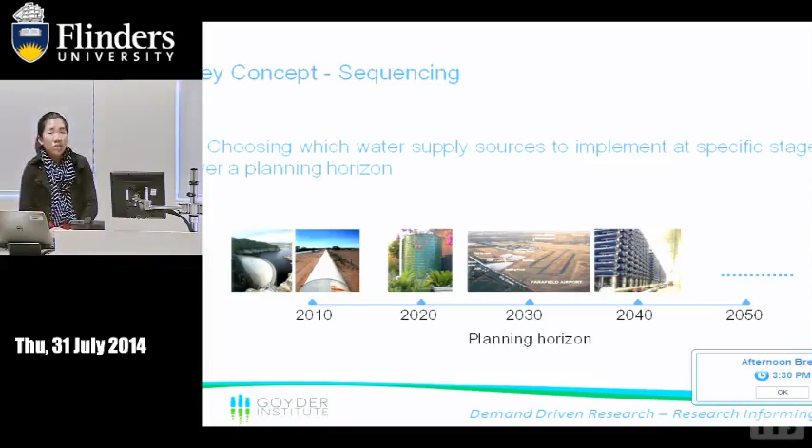As a result of increasing population, climate change, climate variability, and the consideration of multiple sustainability criteria, the problem of sequencing water supply sources has become more complex in recent years. Due to increasing demand and reduced water supply reliability, there is a need to consider recycled water or desalination plants as additional water supply options.

In addition, the need to develop a sustainable water supply system has become increasingly important, requiring consideration of multiple sustainability objectives. So now we're not just looking at the economic cost of the system, but we also need to consider environmental and social criteria. Adoption of sustainability criteria also requires consideration of extended planning horizons of 50 or 100 years, and this will promote increased uncertainties such as population growth, climate change, and technological changes. Furthermore, there is a large level of uncertainty in the supply as well due to climate factors.

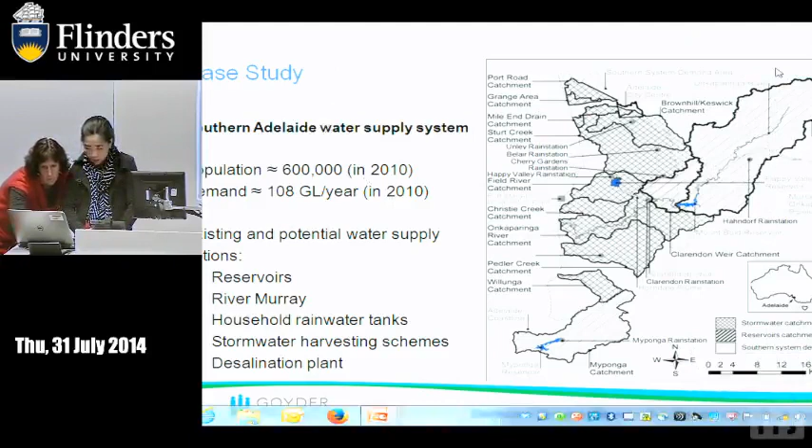This proposed approach is applied to the case study of the Southern Adelaide water supply system to demonstrate and test its utility. It should be noted that the aim of the case study is not to solve the Adelaide water supply system problem, it's just to demonstrate the approach. This is a simplified case study based on the Adelaide Southern system in year 2010. There are existing water supply options such as Happy Valley and Myponga reservoirs, supply from the River Murray, and the potential water supply options we consider in the case study are household rainwater tanks, stormwater harvesting schemes, and a desalination plant.

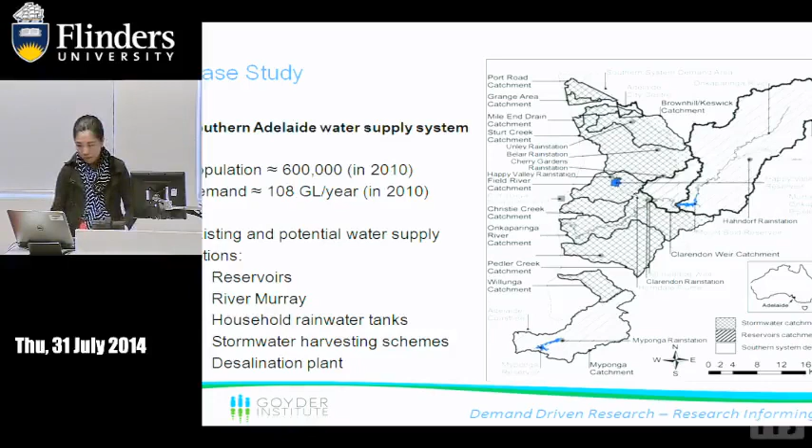The objective of the case study is to minimize the present value of costs and also minimize the present value of greenhouse gas. Decision variables are the timing to implement new supply sources and also the time to expand implemented desalination plants, which means if we implement a desalination plant in the first stage, the following decision variable would be the timing to expand or not. One of the decision variables is the capacity of the rainwater tank.

The uncertain variables we consider are future population growth and also climate change impact in terms of rainfall and evaporation. This case study is done for two assumed realities, and each reality will consider 7 different possible scenarios. The planning horizon is 50 years with a 10 year staging interval, which means we're looking at a 50 year plan, but making decisions every 10 years.

This proposed approach consists of 3 major components. The first is to identify a diverse portfolio of optimal water supply sequences for 50 years using a scenario-based multi-objective optimization model. The second component is to assess the performance of the portfolio of optimal sequence plans in terms of robustness and flexibility over the current staging interval, and also to look at the variation of cost and greenhouse gas for the whole planning horizon.

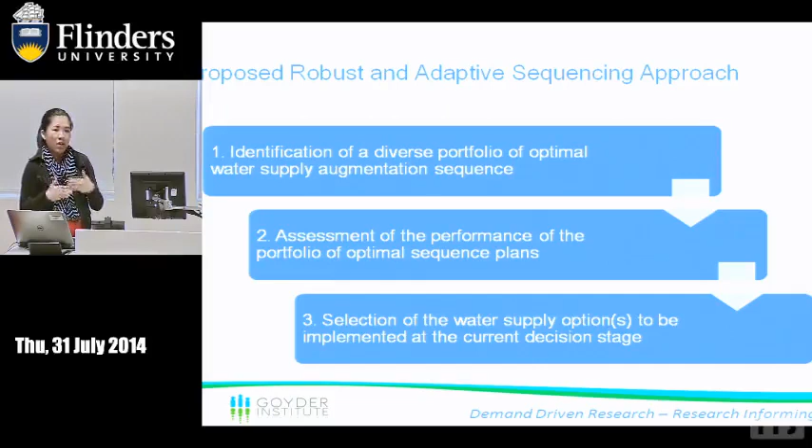We'll actually look at the robustness and flexibility for the current 10 years, even though the plan is optimized for 50 years. I'll explain that in detail later on. The third component is to select which water supply sources to be implemented at the current staging interval. We are planning for 50 years, but we don't want to lock ourselves in for the future 50 years. So we assess the robustness and flexibility of the system for the current 10 years, and then decide which supply options to implement and lock in for the subsequent stages.

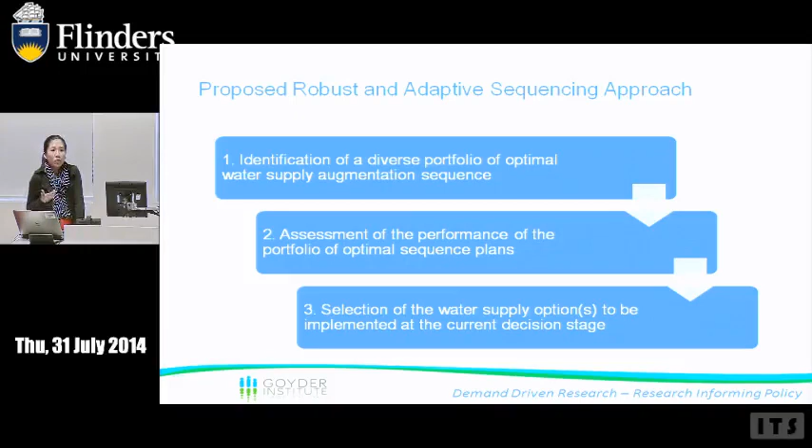For the next decision stage, we'll do the same thing, because uncertain variables like future population growth and rainfall will change over time. So for the next staging interval, we will plan for another 50 years using a new set of projected population growth, rainfall, or evaporation data.

The robustness of the system is calculated based on the reliability of the supply and also the vulnerability of the supply. Reliability of the supply is a measure of how frequently the supply capacity equals or exceeds the demand, and vulnerability is the percentage of the maximum annual supply shortfall over the planning horizon. The robustness of the supply is the fraction of scenarios when the system reliability is greater than 95% and the maximum vulnerability is less than or equal to 27% of the demand.

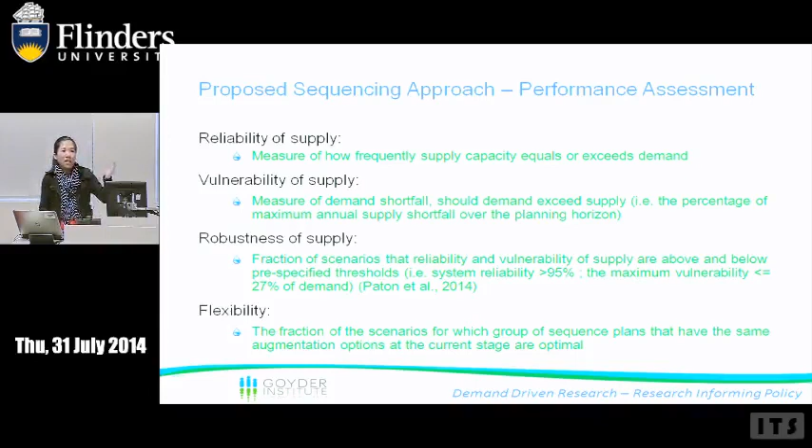The flexibility of the system is the fraction of scenarios for which a group of sequence plans have the same augmentation options at the current stage. If we're considering 10 uncertain scenarios, and that group of water supply options appears for all of them, then they will have a flexibility of 1. If they only appear in one of the scenarios, they have a flexibility of 0.1. So 1 means more flexible, 0.1 means less flexible.

This is the first step of the sequencing process. The first thing we need to do is define the uncertain variables and their range. For the case study, I'm looking at future population growth, rainfall, and evaporation, so I need to define the range as well. Then I need to define the scenarios, which are the combination of the selected uncertain variables. The range and the scenarios should be selected to reflect the best current knowledge in relation to the possible changes of the uncertain variables over the planning horizon.

And then the optimization process will be repeated for different scenarios to generate different sets of the Pareto front solution for each scenario. So for the case study, we're looking at 7 different scenarios for each reality.

So we'll get seven different Pareto front solutions. And this optimization, we're actually looking at a 50 year planning horizon. So the next step is we need to assess the performance of the sequence plan. But this step, we're only looking at the current staging interval, which is 10 years. As I said, we don't lock ourselves for the future 50 years.

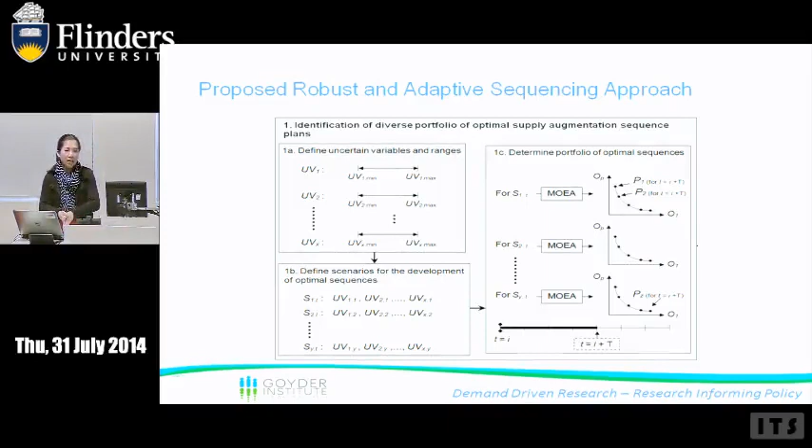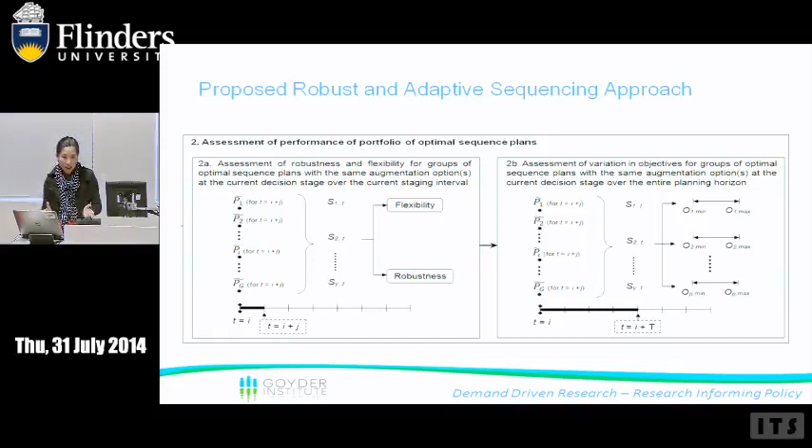So if we go back, if we look at P1, it actually conceived a plan where rainwater tanks should be implemented in year 2010, followed by stormwater schemes in 2020. But the next step, we're only looking at the rainwater tank implemented in 2010. So what we need to do is we need to assess the water supply sources, which is chosen in 2010. But the range of the cost and greenhouse gas we're considering, it's for that whole 50 years.

So this process that I just mentioned will be repeated for every decision stage, and this is because the uncertain variables change over time, so the scenario that we consider might change as well. So we need to actually do the whole process from stage to stage.

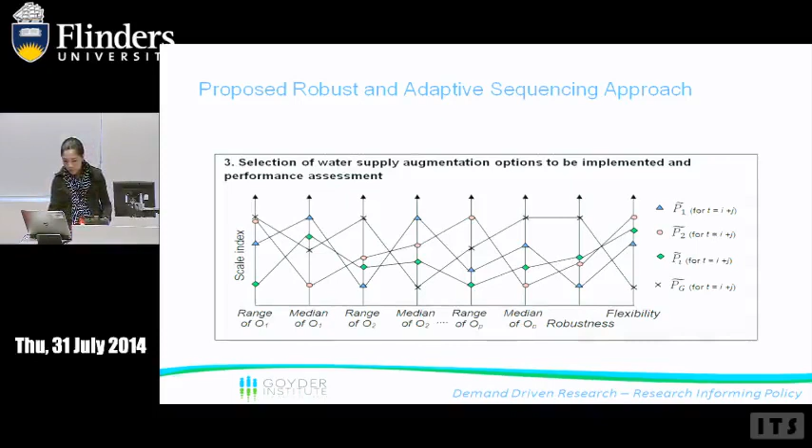So if we look at solution 1 and 2, they actually perform better if we just look at the median of the costs. And solution 4 and 6, they have a high level of robustness, but they have a very high median of costs. So there's a trade-off there.

And sequence plan group 3 and 5 tends to perform well across all the performance criteria. So they clearly outperform all other groups in terms of median and range of the greenhouse gas. But you may find, in terms of flexibility, they're actually at the lower end, but there's a trade-off: if the flexibility is slightly lower, you get a higher robustness.

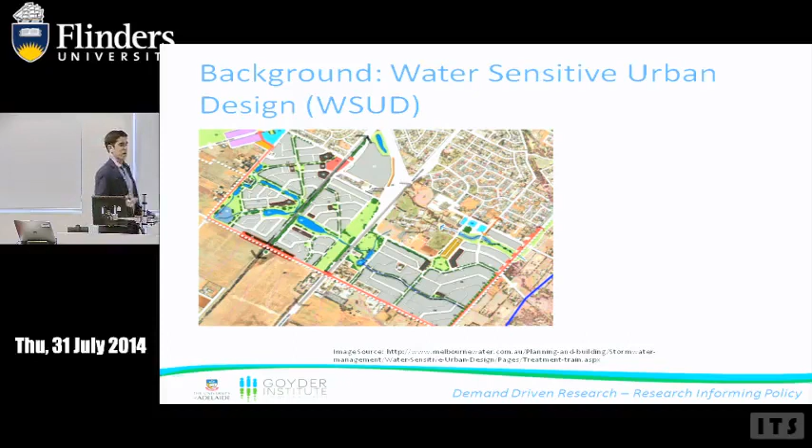So a bit of background about the concept of water-sensitive urban design. You may have heard of it before. If you imagine we have some unused farmland here at the moment, when we have a rainfall event like today, the behaviour of the runoff is going to be radically different once we decide to get more value out of that land with a housing development. When water lands on that catchment, it's going to run off a lot quicker and in much higher volumes, and it's also going to introduce pollutants into our natural environment.

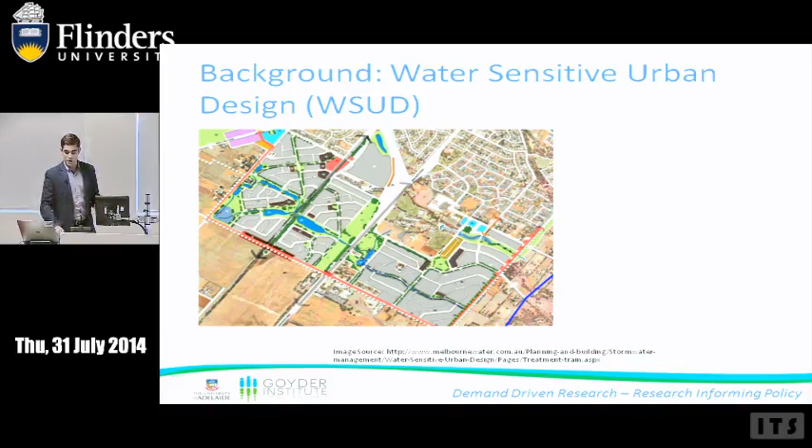To deal with some of these problems, the evolving field of water-sensitive urban design tries to get as many benefits as possible out of the design of our development—for example, returning those altered flows back to the natural flow regime, removing added pollutants, protecting our property through flood control, stormwater harvesting and reuse, and also increasing amenity and community benefits through that design. So there are a lot of objectives we're dealing with in water-sensitive urban design.

We strive to achieve those objectives through the implementation of what are called best management practices. You might be familiar with what they are. Under the umbrella of best management practices are wetlands, rain gardens, swales and curb and gutter, sediment ponds, rainwater tanks, and gross pollutant traps. Particular best management practices are better at achieving certain objectives, and some of them can achieve your flood control and treatment objectives as well.

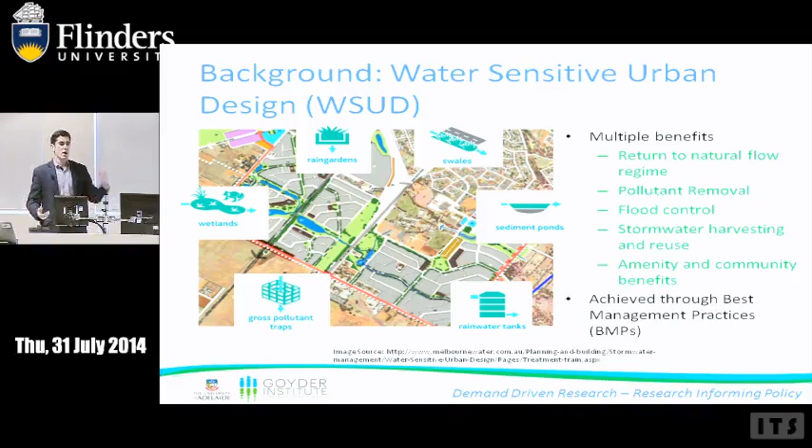And a brief introduction to the optimization approach we're using. Engineers and planners will go out and look at the development site, identify which best management practices can possibly be used, and define the constraints of what treatment practices can be used and in what order. So given those constraints, and also the objectives they want to achieve, we take those objectives and constraints and implement them into our model.

The way the model works is it generates one possible solution to the problem, tests its feasibility through a simulation model—in this example we're using eWater MUSIC for treatment performance—evaluates the performance of that solution, and then feeds it back into our optimization algorithm, which I was trying to think of a good metaphor for.

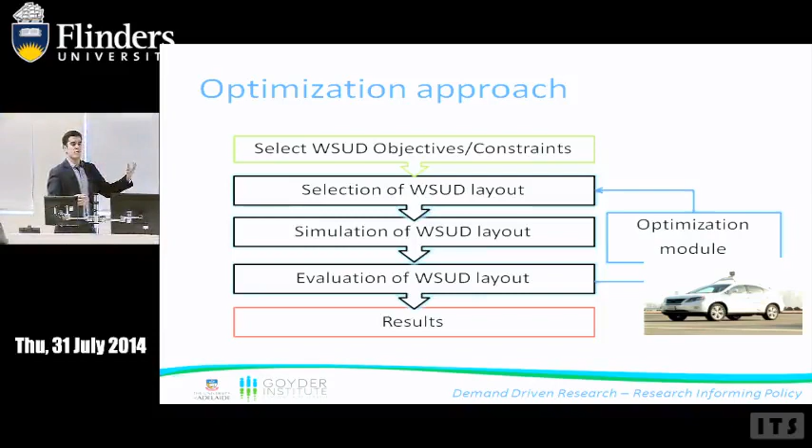It's sort of like a self-driving car. It has some intelligence, some artificial intelligence, and it wants to search through the millions of possible combinations of solutions—trawling through the infeasible solutions, trawling through the solutions that are feasible but don't perform very well—and then try to find the optimal or most efficient solutions with respect to treatment performance, flood control, and our other benefits.

So there's been some challenges that researchers are addressing, like how engineers will use these optimization approaches in practice. We deal with problems of perception of what the optimization approach can do and can't do, what it is and what it isn't.

You might be familiar with internet memes about how different people perceive what we do - for example, environmental scientists, their friends think they do something, their boss thinks something different. I tried to emulate this with what we face in water-sensitive urban design optimization. As a WSUD optimization PhD researcher, I'm looking at computer programming daily, linking that with a simulation model to get accurate, evidence-based results.

Some engineers see that the optimization algorithm, because it has its own artificial intelligence, means perhaps they don't have much of a place in that procedure. They see the whole approach like a self-driving car, and wonder where the place for their experience and judgment in designing these systems is inside this computer algorithm.

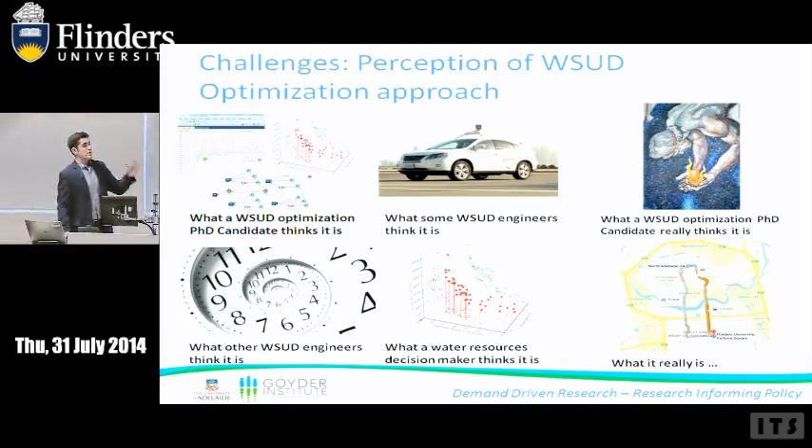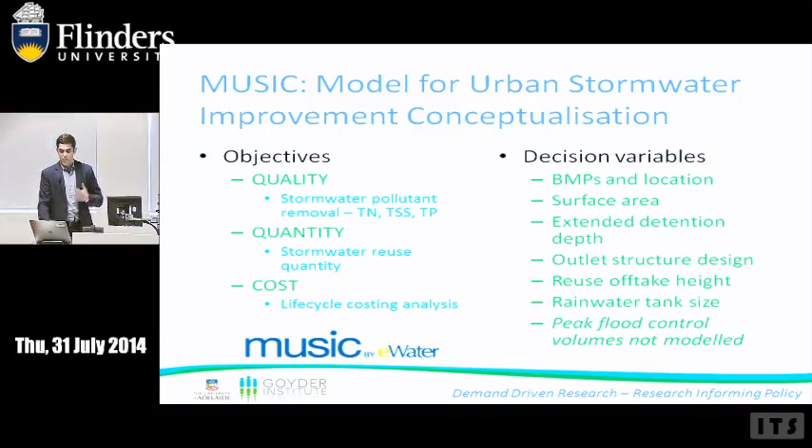Getting into the simulation model we're using, this is linked with the optimization algorithm, and it'll simulate thousands of runs with this model. I think it's an industry standard, and we can assess water quality, quantity, and life cycle cost by changing the layout - what best management practices we're going to use, and where in the catchment we're going to have them. The surface area, extended detention depth of some devices, and other parameters we can change.

As far as how it's constrained in formulating solutions, I've trawled through the WSUD engineering procedures to make sure best practice procedures are implemented into the optimization approach.

We've also discussed with consulting engineers how they approach the problems, to try and garner some of that engineering judgment or knowledge and place it into little rules. For example, the percentage of surface area to catchment size might be indicative of what the optimal size of a wetland might be.

So through the problem formulation - deciding what options are on the table, and also the constraints within the algorithm - is where we've implemented that judgment.

The case study itself consists of a new housing development where there's essentially 6 nodes - 1, 2, 3, 4, 5, 6 - with some options: there's an upstream either detention basin or wetland, we can have rain gardens or not, and also there's an option for a wetland downstream as well.

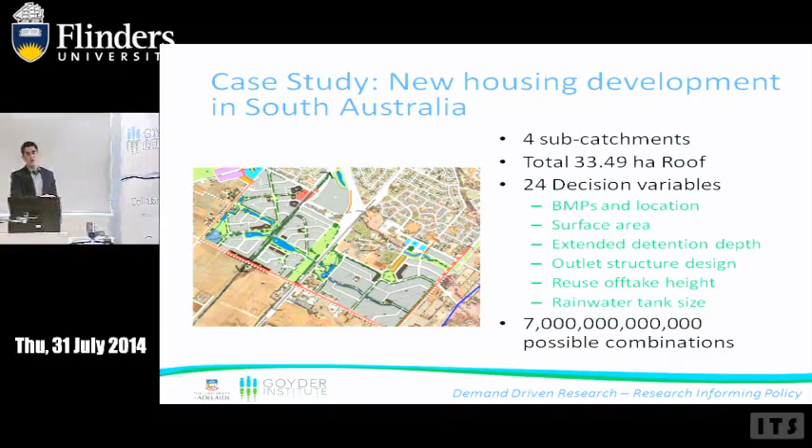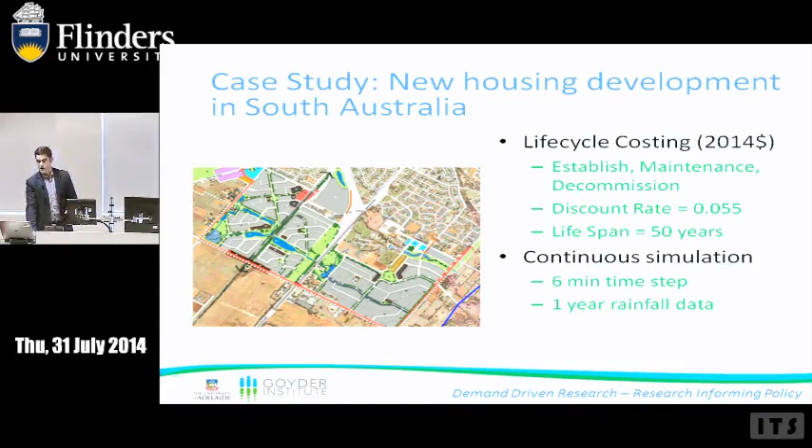And we're looking at life cycle costing there, a couple of data points there, and continuous simulation, which means that runtime is going to be an issue.

The intention of the case study was to look at the trade-off between 3 objectives: the life cycle cost of the system we're implementing, how much treated water can we get out of the system for reuse purposes, and also how well can we treat our runoff.

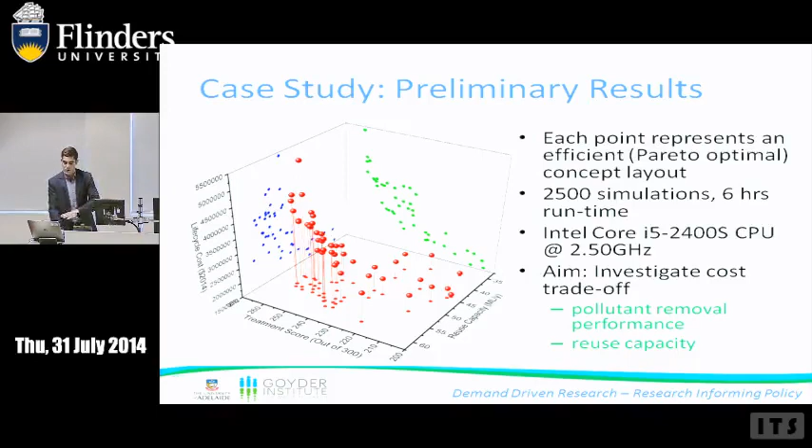So this is jumping straight into what the optimization spits out, or what the results of the optimization are. Each point on that surface there is what's called a Pareto optimal solution - each one is a concept, a potential solution we could put into practice with its own features and combination of parameters. This was done on a desktop computer, so what a consultant might have access to, and around about 6 hours of runtime. So we can look at the projections of these between life cycle cost and treatment, and life cycle cost and reuse capacity.

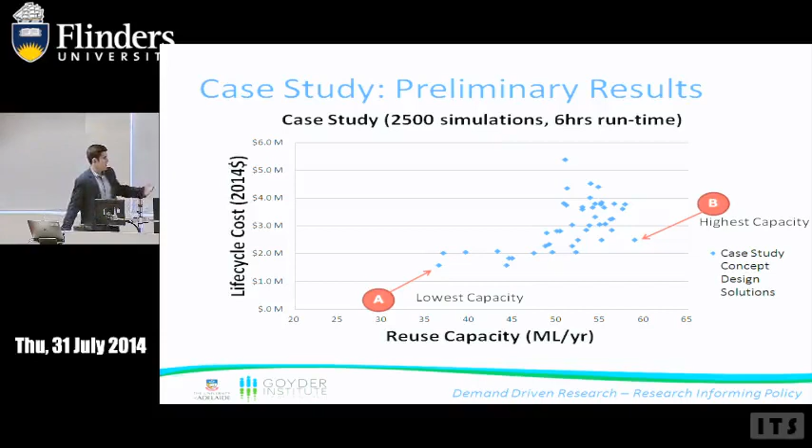So that projection there, I've just identified a couple of solutions to look into in further detail: the solution that gave us the highest capacity for the comparatively lowest cost, and also the lowest cost solution, which incidentally gave us the lowest capacity, potential reuse capacity.

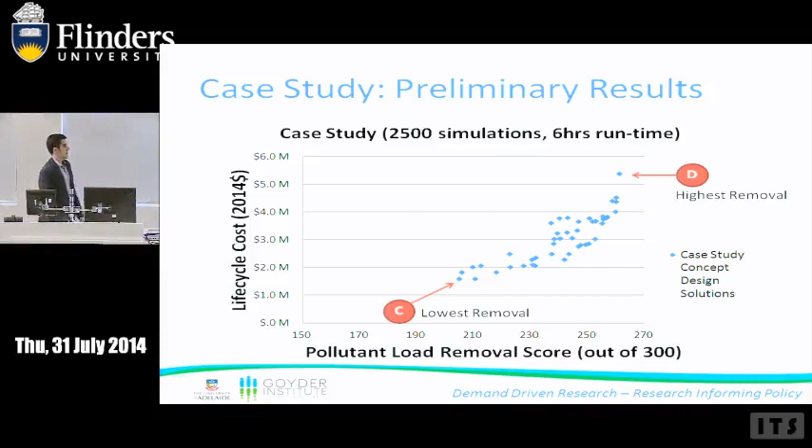And also looking at life cycle cost and pollutant removal. Again, our lowest cost solutions give us the lowest treatment performance, and our highest Rolls-Royce solution gives us a very high treatment at a high cost. I could have chosen a solution that has a little bit less treatment, but you could be saving some money there as well. So we could have also picked that solution.

So once you have these solutions available to you after the optimization results, the idea is to go through and analyze what trade-offs we get. So perhaps having extra rain gardens wasn't actually worth the extra treatment and extra cost.

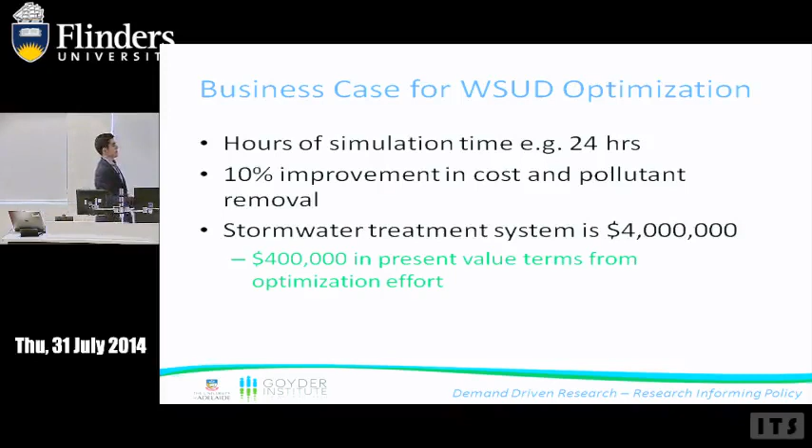So a little bit about the current and future work for this research. We're looking at incorporating more of that engineering knowledge to help that self-driving car find solutions in a more efficient way, so get our runtime down, and address some of the complexity. I know in the new water-sensitive urban design guidelines, they're looking at more continuous simulation for different risk analyses, so that's going to be incorporated into the framework.

And looking at a case study similar to what Eva was talking about, so sequencing these best management practices over time to map the way that the housing development would be built in stages over time, trying to maximise the benefits over a longer period. I think that's all I have for today. Thank you.

Thank you, Michael. Robert is next. Just pop it in your pocket. I think it's the easiest. My pocket's not very big. There we go.

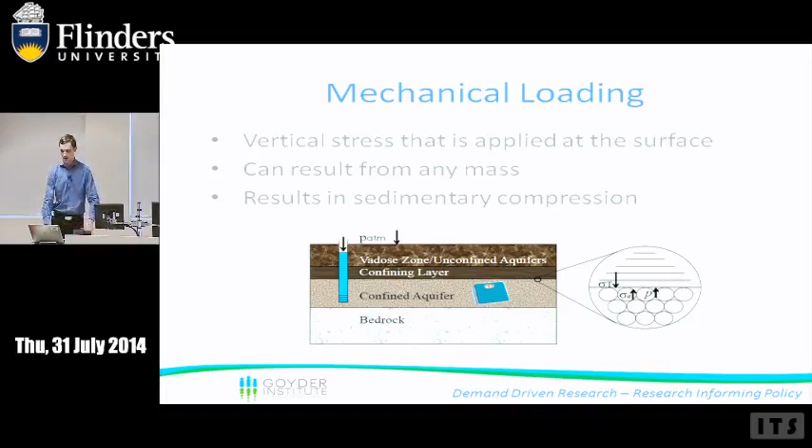And that can result from any mass, so not just a hydrological mass on the surface. It's basically the sedimentary compression which causes this pressure change in a confined aquifer. Oh, there's some weight on the surface.

The performance of mechanical loading is affected by the solid properties of the aquifer that you're measuring in. I assume everybody here knows that a sponge is pretty compressible, and pumice, which looks a bit like a sponge, is quite rigid. So say we put the same load on a sponge and on some pumice, and say also that we build some walls around them so that they're confined and no water can escape.

When we put this load on the sponge, it will compress and the water pressure inside will increase. Whereas when we do this on the pumice, the water pressure won't increase so much because a lot of that load or stress has been taken up by the pumice itself. I guess if you can imagine, if you stomp on a sponge and stomp on some pumice, the sponge is going to squash and the pumice isn't.

So if you have a very compressible aquifer, when you have some mechanical loading on the surface, you'll see a bigger response in the fluid pressure, and if your aquifer isn't so compressible, then you'll see a smaller response in fluid pressure.

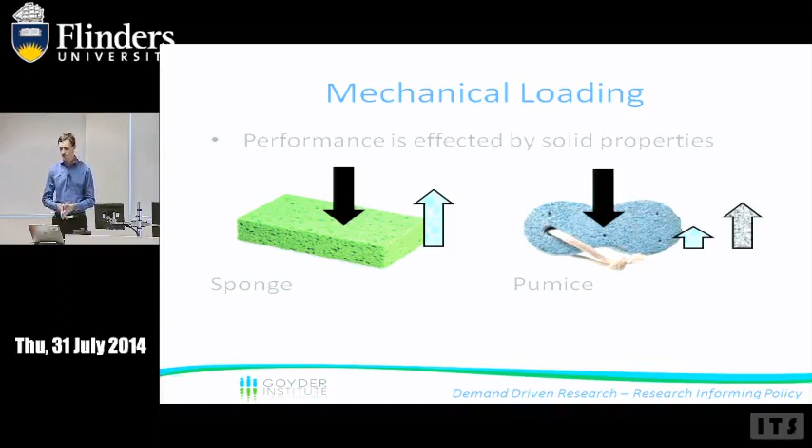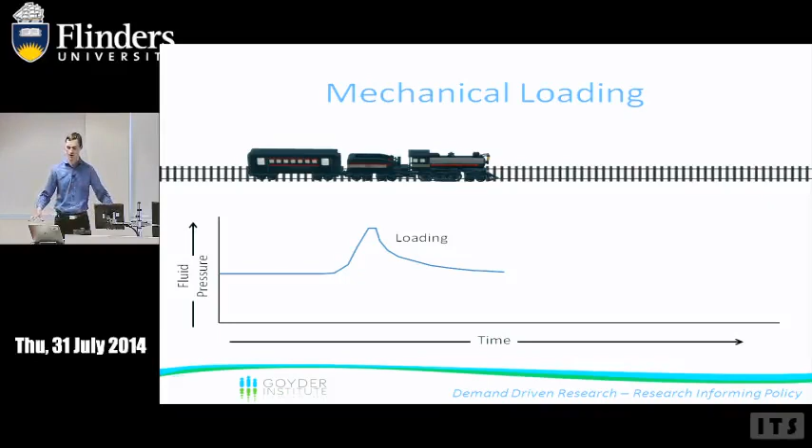This mechanical loading concept was first discovered in 1939. There's a nice paper by Jacob, 1939, which shows this. He was out measuring his borehole next to a train station, and a train pulled up to the station, and he noticed that his fluid pressure in his confined aquifer shot right up, and then the fluid pressure dispersed away from where the borehole was. Moments later, the train pulled away, and there was some unloading, as we like to call it, and the fluid pressure went down and then slowly returned to a normal steady state condition. So that was 70 years ago that the mechanical loading process was first identified.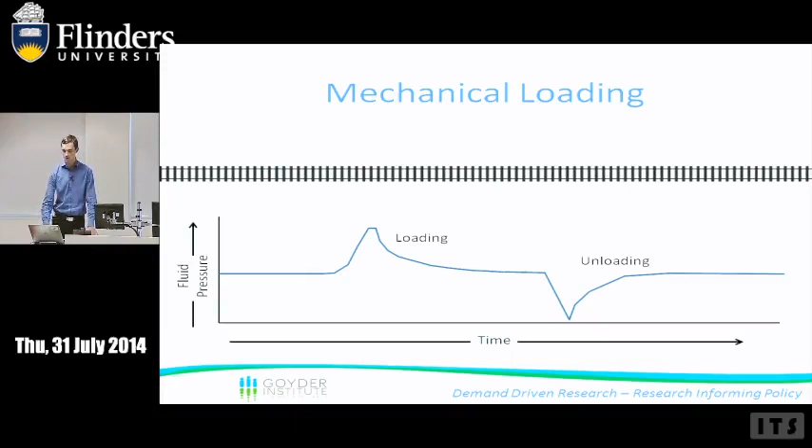So I said that I was going to tell you about a new method for measuring water storage, and that method goes by the name of a geological weighing lysimeter. Some people might be aware of a regular weighing lysimeter, which is essentially, if you've got a pot plant and weighed it in the morning and then weighed it again in the evening, the difference in its mass would be the water loss through evapotranspiration. This is the same concept on a much larger scale.

A geological weighing lysimeter is basically the name we give to any deep confined aquifer that we use to measure water storage above it by looking at the pressure changes in that confined aquifer. Those pressure changes come about as a result of mechanical loading at the surface. When we talk about change in storage, it includes surface water and sometimes groundwater. For this method, it depends on the confined aquifer you're measuring. Basically, it's going to measure the mass of everything above that aquifer. So if you measure an aquifer with 3 aquifers above it, you're going to be measuring the mass in those aquifers as well as the surface. Whereas if you measure a confined aquifer with only an unconfined aquifer above it and then some surface water, that's all the measurements you're going to get from that aquifer.

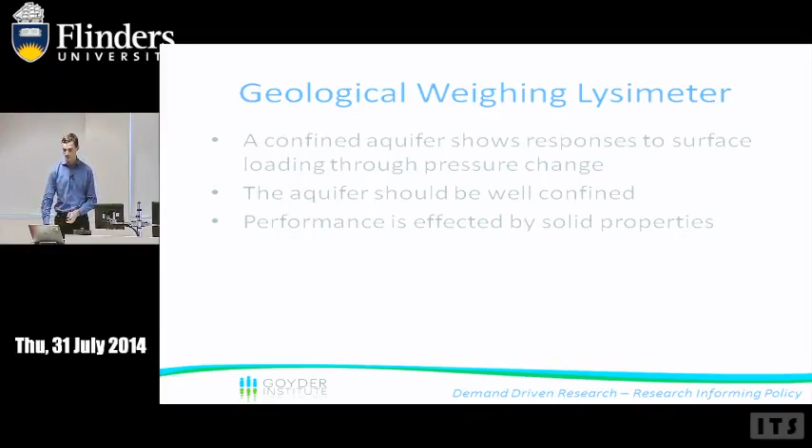To be a good geological weighing lysimeter, the aquifer needs to be well confined, and its performance is affected by the solid properties of the aquifer. I have a small amount of data to show from the lower southeast. This was from a seasonal wetland and from quite a shallow confined aquifer, I think only about 17 meters deep.

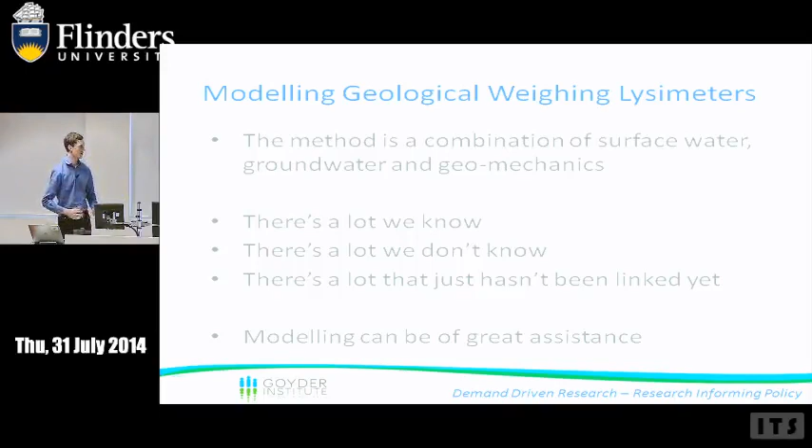So I have a background in my undergrad and honours in surface water and groundwater, but this method is basically a combination of those two things, as well as a lot of geomechanics, which I knew nothing about a year ago. There's a lot we know and a lot we don't know, and a lot that hasn't been linked. So it's quite important that we try to do some modelling of these systems to help further understand how it all links together.

Something I'm really interested in finding out through modelling is the temporal and spatial resolution of a pressure wave. If you look at this cross section, straight through the middle of Adelaide from the hills down to about Semaphore, say I'm measuring in this borehole, and it rains here. Say we have 10 millimetres of rain here one day, and the next day 10 millimetres over here. How will that look different in this borehole? How much longer will it take for the pressure increase in the confined aquifer to get to this borehole from this rainfall event compared to that one?

And is it going to be dampened somewhere along the way? These are all things that we don't know, so these are things we're trying to use modelling to figure out.

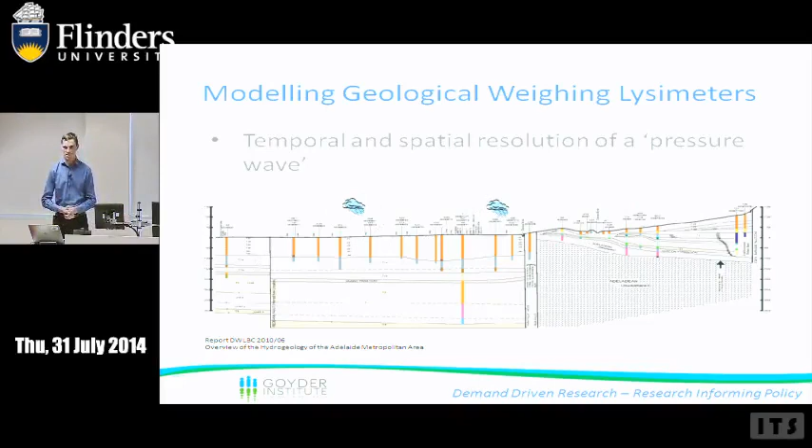I've got a very conceptual and basic model here to show you, which I've made. This is using a program called OpenGeoSys, which is a thermo-hydro-mechanical-chemical model—basically everything you could ask for—from Germany. As far as I know, I think I'm the only person in Australia that uses it. So in May, I actually went over to Germany to talk to the developers and learn a bit about it.

So what I'm going to show you with this model is basically, imagine this is an aquifer. Imagine we live in a world with perfectly rectangular aquifers. And in this 20% of the aquifer over here, it's going to rain for a little while, for a few hours, and then that rain's going to stop.

You have to remember that when rain stops, the mass is still there—it's just not coming in anymore. So we're going to see some mass gradually build up from this rain, and you'll see a big pressure increase where it's raining. Then once that stops, the pressure will dissipate until we get into some type of steady state condition. Hopefully that will run.

There we go—raining, raining, raining, and it stopped raining, and everything's starting to balance out nicely. Now, that in itself might not be that helpful to show you right here, but hopefully it gives you a better understanding of what the method looks like in a conceptual sense, and the type of things we can do with this model, which I guess we're still in the early stages of figuring out because it's all written in German.

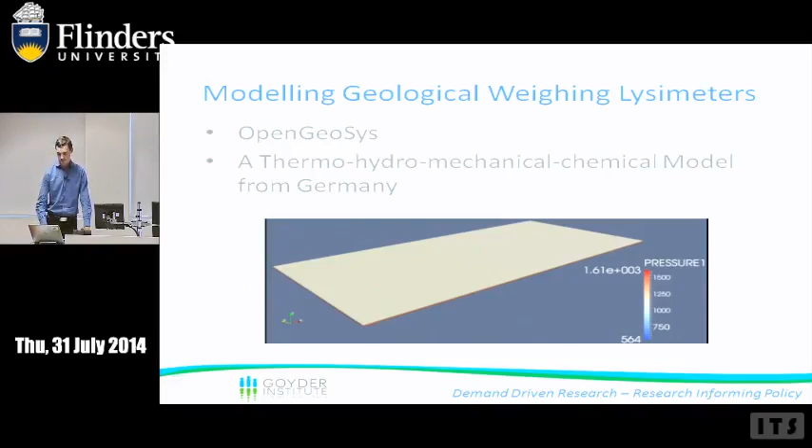So there's some advantages of this method. First of all, and maybe most importantly, you're looking at a real measurement, so no estimations or very few estimations or interpolations of data. This is just like weighing storage change, basically. Because we use high resolution pressure transducers, you can set them to record at any interval you want—2-second data, 2-day data. It's very flexible, also very easy to measure, and the data's quite easy to interpret.

It's relatively cost effective. Some limitations of the method are that it's likely to get lots of noise in your data, and you need a decent aquifer to apply it to, so it's not applicable everywhere. You get a change in storage, so if you have a loss in storage, you can't tell if that's from evapotranspiration or from streamflow—you just know you have a loss. So it depends on whether that's what you're interested in or not.

Loads aren't always hydrological. There's a great story about the pioneer of this method in New Zealand, who was measuring his borehole and looking at the data, and it went up quite quickly and he couldn't figure out why. So he went to his borehole and there was a herd of cows over it, and that's what caused the loading. So if you can imagine a borehole next to the airport, every time a plane lands, you might see crazy things happen.

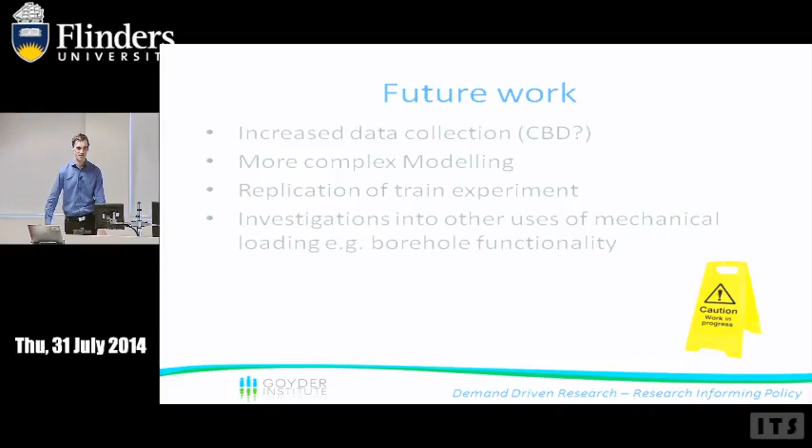Obviously, we'll do some more complex modelling. I'd love to replicate that train experiment I showed you originally. Also, I'm slowly finding out through data collection that there's some other things that mechanical loading can tell us. For example, I discovered a couple of boreholes that were blocked just by the way the data looked.

So that's interesting. A couple of acknowledgements, and thank you.